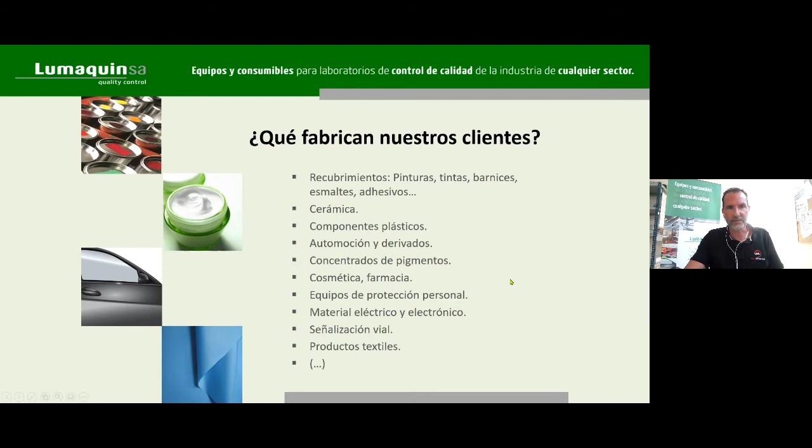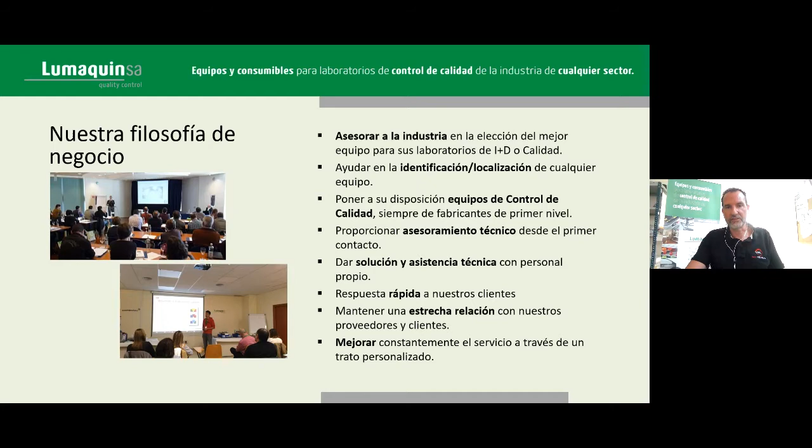Nuestra filosofía de negocio: somos técnicos especialistas en diferentes sectores y productos que fabrican nuestros clientes, y os podemos proporcionar cualquier tipo de equipo, accesorio o consumible de primerísima calidad para vuestro laboratorio. Por este motivo trabajamos con primeras marcas. Os podemos asesorar y ayudar con vuestras necesidades, os proporcionamos servicio de asistencia propio, damos una respuesta rápida a nuestros clientes y estamos siempre a vuestra entera disposición cuando se nos necesita. Es decir, ofrecemos una mejora continua del servicio.

¿Cómo podemos ayudaros a controlar la calidad del producto en vuestro proceso de producción de un recubrimiento? Ahora os explicaré un cuadro de procesos en la fabricación del recubrimiento. En este cuadro podemos ver en el plano horizontal el proceso de fabricación de recubrimientos, desde su inicio hasta su acabado, y en el vertical los ensayos y parámetros que influyen en cada paso del proceso.

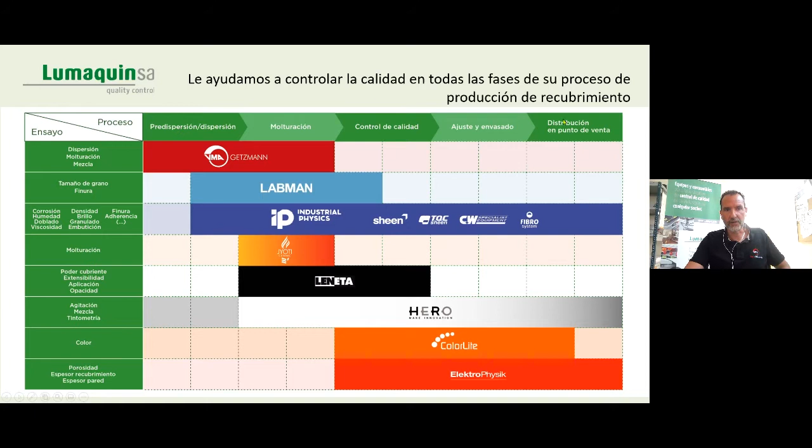Asimismo, podemos ver longitudinalmente todas las diferentes marcas o soluciones que tenemos y el nombre de la representada con la que trabajamos; son diferentes soluciones para cada ensayo. De esta manera podemos controlar todo el cuadro, desde el proceso inicial hasta el proceso final, que es ya la distribución o punto de venta.

En este caso, vamos a hablar del proceso de dispersión y molturación, con la colaboración de una de nuestras representadas, VMA Getzmann. Os voy a explicar una pincelada: VMA es una empresa dedicada a fabricar equipos de laboratorio, planta piloto y producción para recubrimientos, hasta 2.000 litros. Desde la fundación de la empresa, en el año 72, el nombre de VMA Getzmann ha sido sinónimo de producción de sistemas de dispersión y molturación innovadores y de alta calidad, equipados con dispositivos de seguridad integrados y de acuerdo con la directiva de la UE.

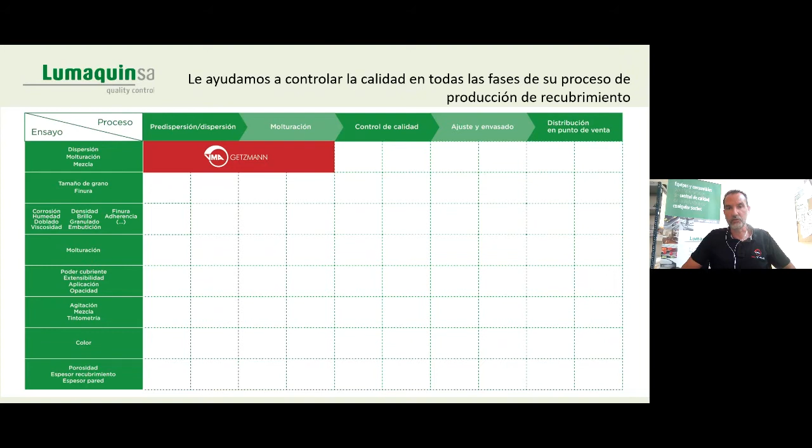De la que a continuación nos va a explicar el señor Christian Getzmann. Now I'm pleased to introduce you, Mr. Christian Getzmann, who will tell you more and better about the company VMA and the topic: safety systems and new control in compliance with the regulation for DISPERMAT and dispersing machine. Go ahead, Mr. Christian.

Okay, so let me start to introduce myself a little bit and our company. It's an older picture from our company from, I think, 2000. I want to talk today a little bit about new controls and compliance with the European safety regulations.

The safety is an aspect which is getting more and more strict, especially for dispersing machines, as you have turning dissolver discs, and they may hurt people. And of course, the controls we build, the machines we build, they have to be in compliance with the laws of Europe. And the second subject, if we have time, I want to go through quickly what explosion proof means for dissolvers, for laboratory, pilot plant, and also production machines, for our controls, and also with the new safety module we have released.

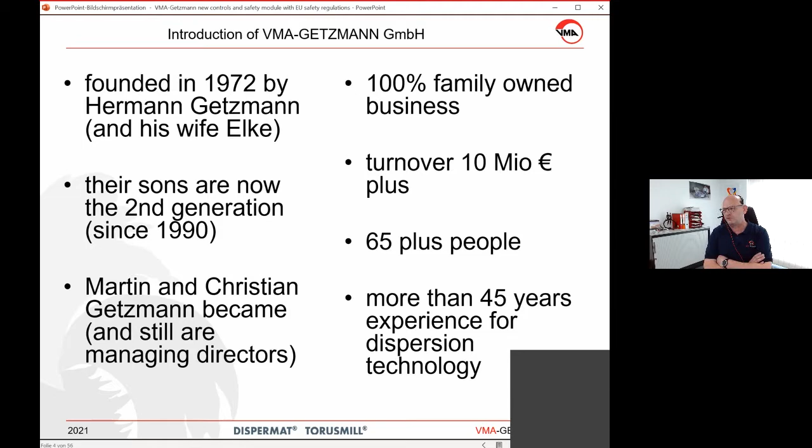We are located in the center west of Germany, so in the area of Cologne. Most people know Cologne, Bonn, the former capital of Germany. We have our own design department, so we tailor-make dissolvers due to the needs of the customers. We are supplying originally the paint and coatings industry, but meanwhile also inkjet, ceramic, pharmaceutical industries, adhesives. There are various industries. Wherever you do dispersion, particle reduction in a wet process, it will be a project for our company.

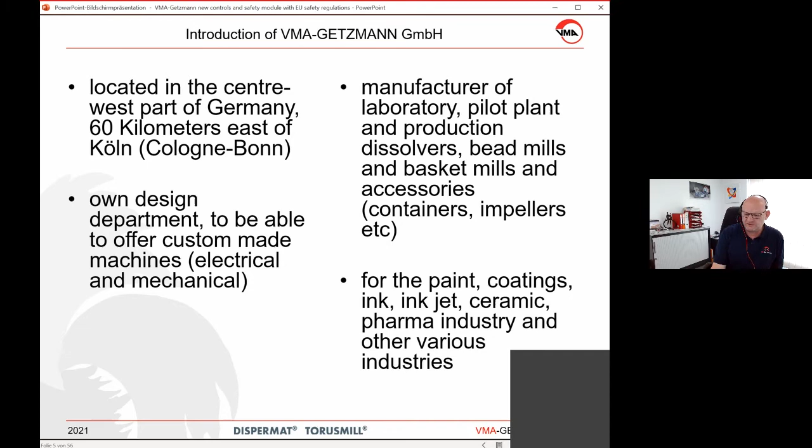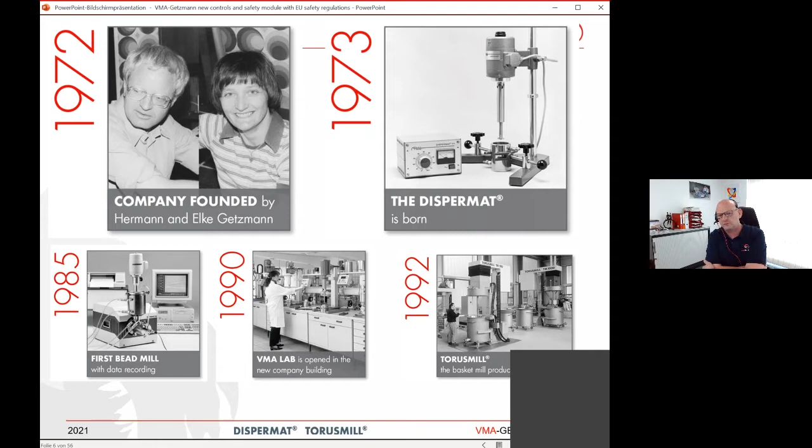So few pictures from my parents in 1972, and you can see the first DISPERMAT was born in 1973. You could see the very first DISPERMATs, they had already a shaft protection pipe. The container was held with a simple clamping, but there was no limit switch, nothing. In 1985, we built our first bead mill with our own built computer. In 1990, we opened our laboratory. In 92, we opened our pilot plant.

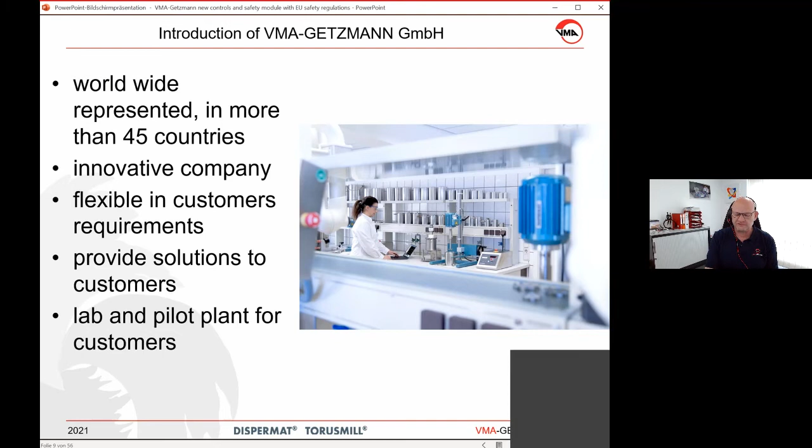Okay, that's me, my brother and myself, the company. We did an extension last year. It's now finished, we basically doubled the space. We are worldwide represented in more than 45 countries, like in Spain through Lumaquin. We keep several patents. We provide solutions to customers, and importantly, we have a lab and pilot plant for customers. So whenever you feel the need of a trial, we are more than happy to welcome you.

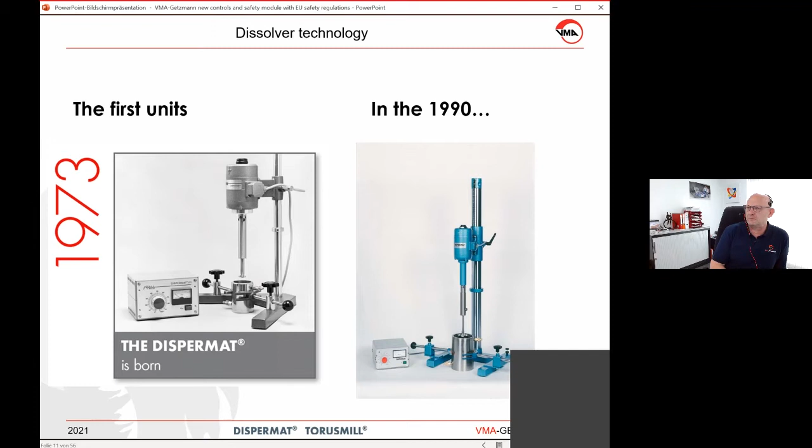Nobody thought about what happens if the chain breaks. Nobody thought, is there any security for the people working underneath with their hands? Nobody thought, do we need to have some kind of limit switches? So that was very much standard, and you can see abroad in many places it's still used like this.

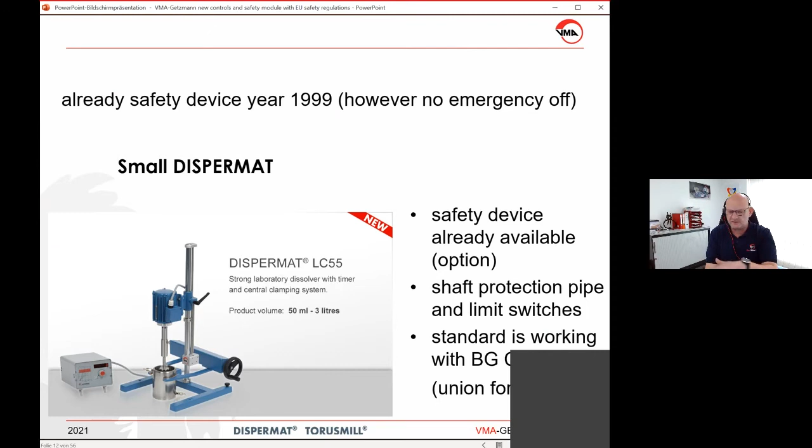In the end of the 1990s, 99, we started even for the smaller DISPERMATs to have safety devices. At that time it was an option. A safety device meant a firm clamping of the container was necessary. The dissolver disc is inside the container, and you are not able to swing the motor to the left or to the right. So that was conform with the standards of the BG, that is the Union for People Safety in Germany. So we kept that as our standard, but there was no law as such.

In the year 2000, for little larger dispermats with more than 2.2 kilowatt, there was a possibility to get covers as an option. There were limit switches, but you could see there were safety things here in the back where we tried to set the limits, the lowest point and the highest point, so nobody can get hurt. But there was no way of redundancy of limit switches. It's like braking with a car - you have different circuits. If one circuit breaks, the other circuit still brakes your car. So it was basically a one-channel technology.

The reason I mentioned the 2.2 kilowatt - in Europe, there's a gap for machines below 1.5 kilowatt and above 1.5 kilowatt. Just keep that in mind. There are different laws for really small instruments and a little larger instruments.

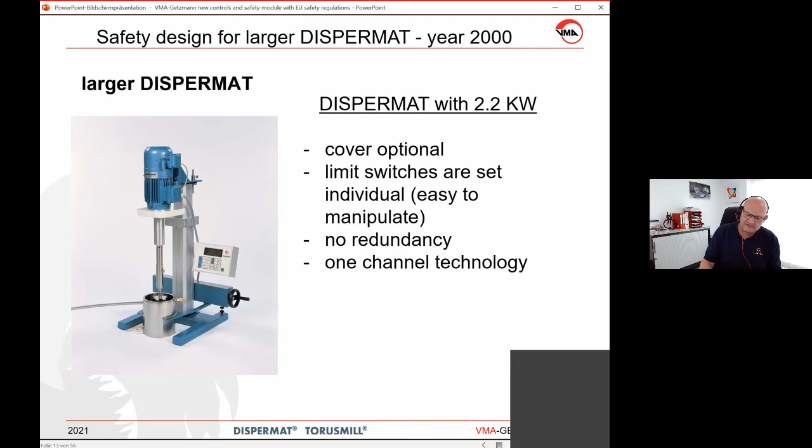So dispermats with current safety devices have an emergency off button. For the small dispermats, the cover is still an option. The limit switches should not be able to be manipulated. You have a safe clamping and adjustable limit switches. The question is always, you have different containers, and we have to make sure that with different containers, the customer can safely use the instrument.

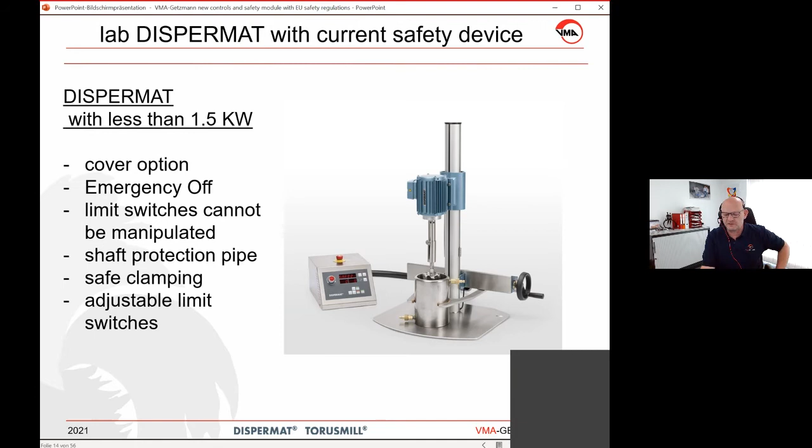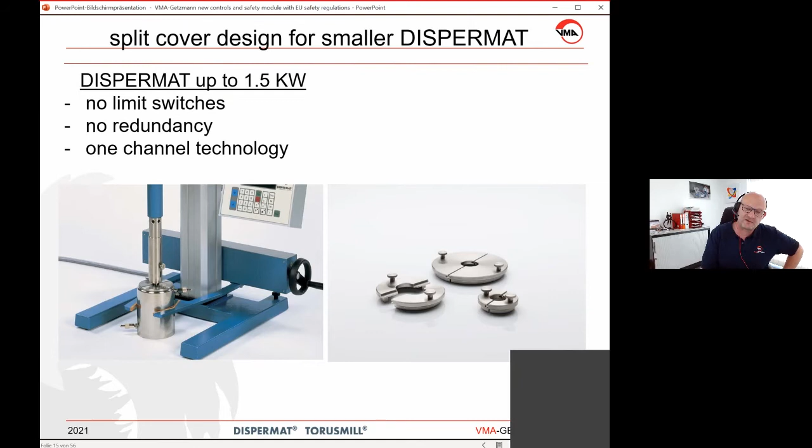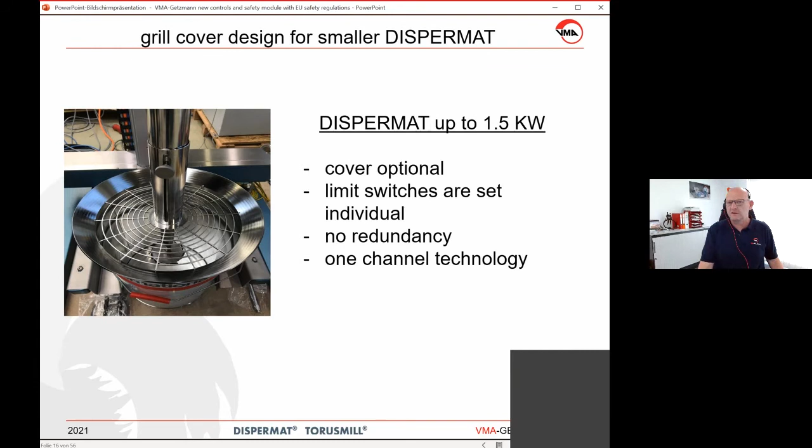Smaller machines, we could use split covers. Some people use carton, but split covers would be one way to avoid fumes coming out, and also to stop you putting your fingers inside. We developed that together with BASF. We call it a grill cover, so you can still see the flow of the product, but you are not able to put your hand inside, because that is always the issue. People are afraid that the user can put his hand into the system.

Very popular is also what we call a hanging flat cover. You have a cover, for instance, on the protection shaft pipe. You can move it up and down, and you can use it for different containers.

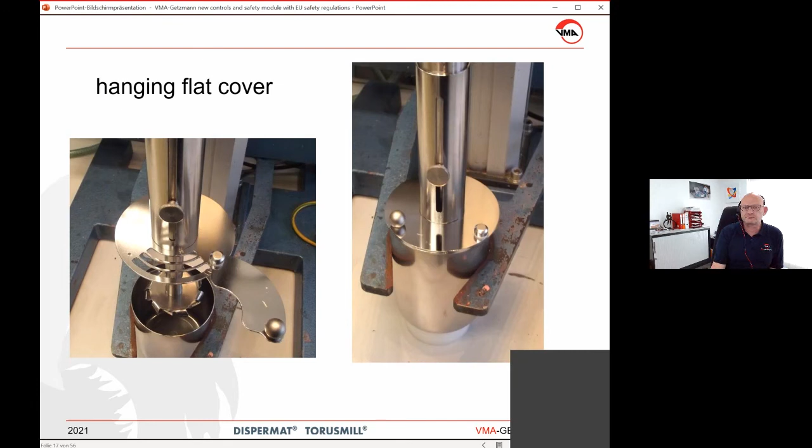There's also versions where the requirements are really strict, where we have split covers with sensors. This is just to let you know, this is not something invented by Getzmann. We call it safety distances for reaching through openings of regular shape. By law, there are openings with defined sizes. For example, if you have an opening of 20 by 30 millimeters, 2 by 3 centimeters, you need 850 millimeters, 85 centimeters, of safety distance for a proper opening. So all this is not invented by Getzmann, it's by the law. It's not something we want to do, but it's a must-have.

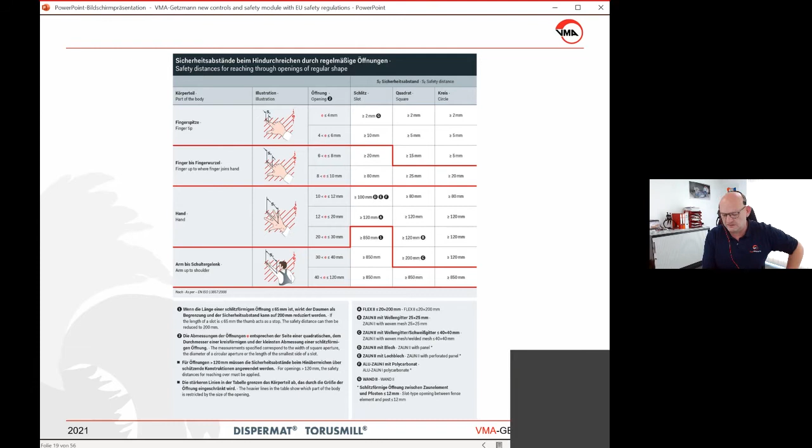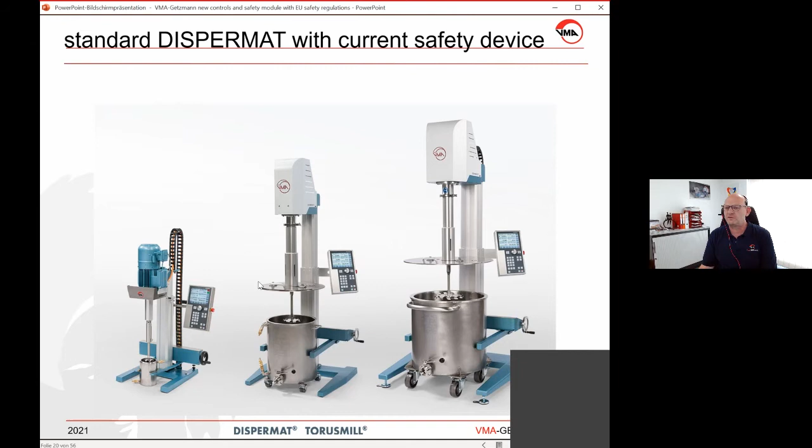You can see these are standard dispermats with current safety devices. The smaller machines without the cover, the larger ones with a hanging flat cover, and the other one also with a hanging flat cover.

So how we implemented this into our new controls: we have a control we call CN, that is pretty unique. We have an H1 and H2, two values we can select freely on the control panel. We set our lowest and our highest position of our dissolver disc, and we can also see the current height of the dissolver disc. So we want to reproduce our products, and for that it's quite important.

So with more than 1.1 kilowatt, these controls are redundant. With less, there's not a need for redundancy. We have a 2-channel technology for machines more than 1.1 kilowatt.

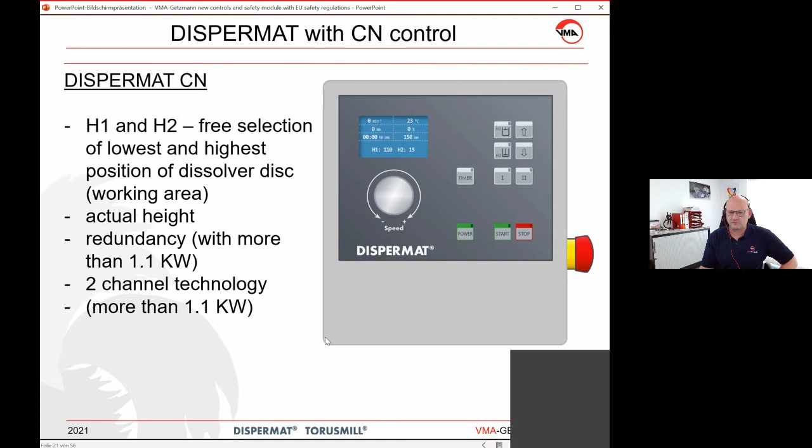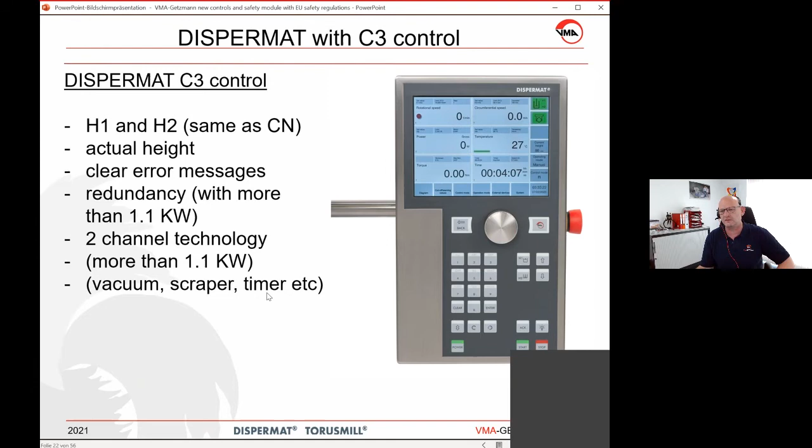We have another control, it's called C3, it's pretty new on the market. You also get the same H1, H2, actual height, but we have clear error messages, redundancy, and the possibility here for vacuum, scraper, and timer, elapsed time counting upward or downwards. You have a database, etc.

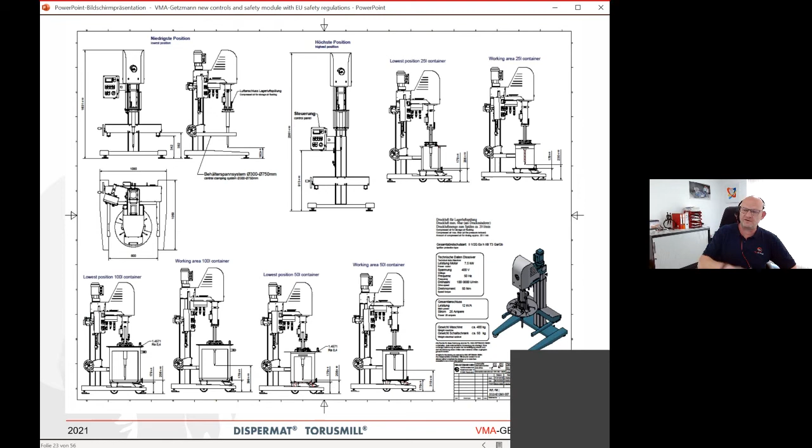That is very often what the customer comes to. The customer has not one container. In production it's different, you have one container dedicated for one dissolver. In laboratory, you have multiple containers, smaller and larger, but you only want to use one machine. We need to supply one safe machine for all of those different containers, including the covers. So the safety technology means for us that you can start the dissolver motor only if the container is safely clamped. We use the dissolver motor only if the disc is inside the container.

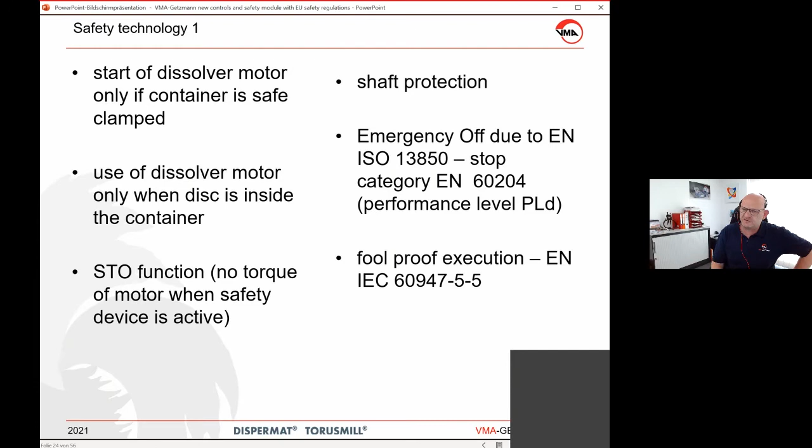We have an STO function, that is a function where no torque is built by the motor if the safety device is activated. It's important when there's an accident that the motor has no more torque to hurt any people. We need a shaft protection pipe, and usually this shaft protection pipe can be extended in length. We have an emergency off switch due to ISO certification category 60204, and it has to be a foolproof execution.

The motor is integrated with thermosensors, so it shuts down if it gets too hot. You also have a reduced noise level. The machines are delivered with CE certifications, and this is also quite important.

Whenever you have offers from any supplier around the world, you should be able to see at least the risk assessment. Risk assessment is something the manufacturer has to do to judge how risky his own machines are.

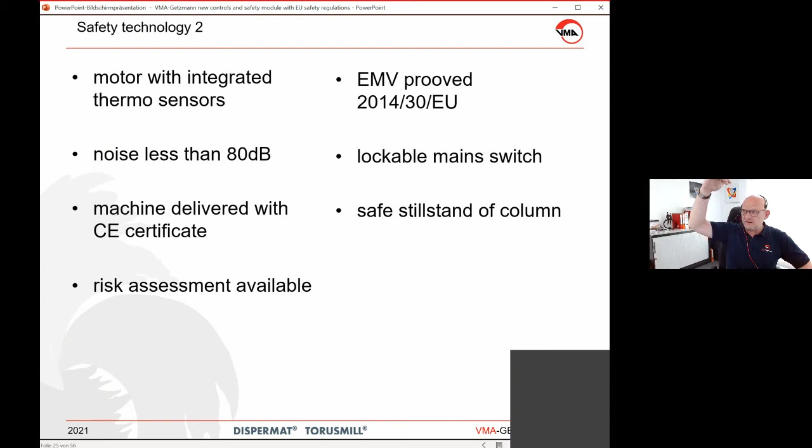We also have EMV approval to 2014/30/EU. We have a lockable main switch, and we have a safe still stand of the column, meaning the motor and the stand cannot go down immediately.

We have a 2-channel technology to Cat 3 EN ISO 13849 for machines more than 1.5 kilowatt, with cover, and what we call a self-teaching function. Important for you: there is no grandfathering for old equipment.

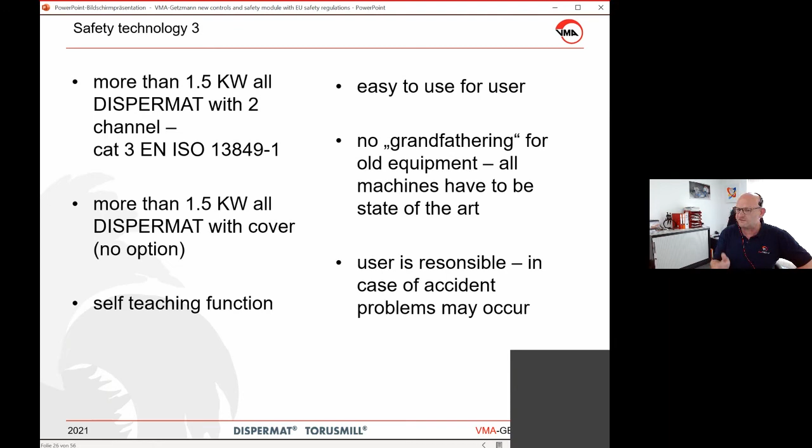People say, yes, we have old equipment that is 20 years old. That machine is not state of the art, and you're not supposed to use it anymore. People do use it anyway, and nothing happens unless you have an accident. If you have an accident, there will be investigations from unions, etc. So the user is responsible. You are responsible for the safety of your machines.

That is the summary. We are a little bit short on time.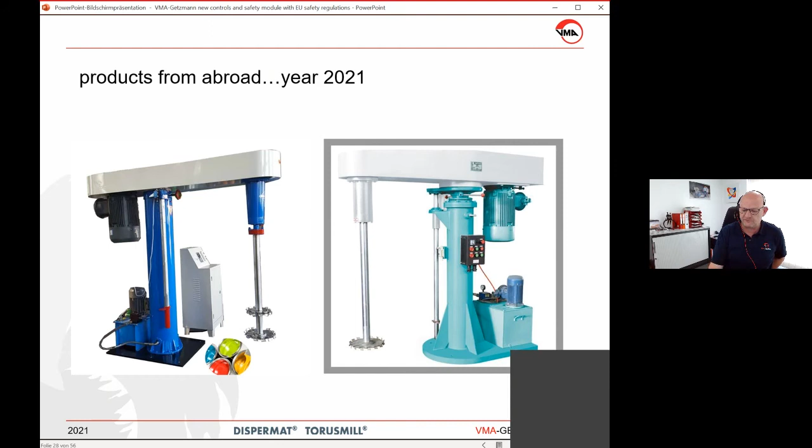Again, the lab has different containers from small to large. The handling should still be easy and comfortable. We have different positions of limits, and we have a TÜV-certificated safety module for that.

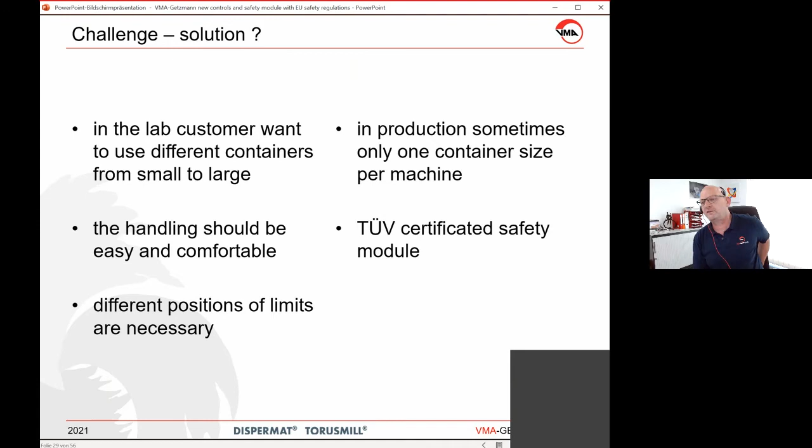So we realized the H1 and H2 not by something invented only by ourselves—it was invented by us, but it has been approved by the TÜV. To give you an idea, when you start to evaluate a machine, you ask how severe is the injury with a dissolver, and we say, okay, it's pretty severe—you get an irreversible injury.

Does it happen often or not so often? We say, okay, it's maybe seldom. Then we ask, how possible is it to have an accident? Is it less possible? Yes, it is less possible. So we come here to a D. Whenever you see this, it's called PLD, Performance Level D. Keep this performance level in mind.

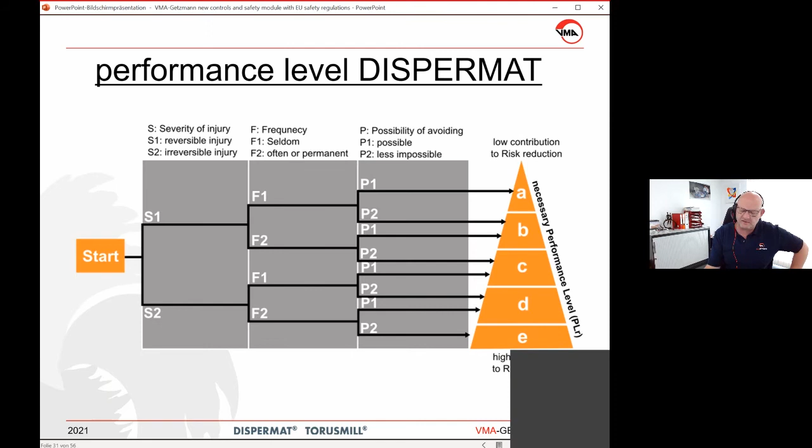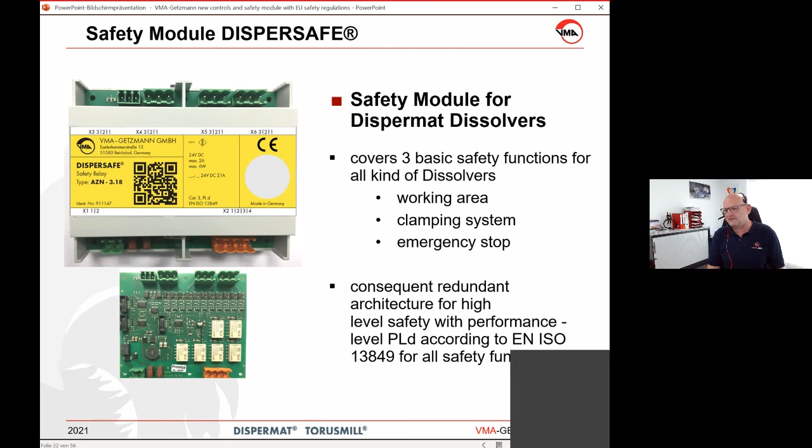If you Google it, you will find performance levels described in many different ways. This is the safety module we have designed. It covers the working area, H1, H2, the clamping system, and the emergency stop, all at the PLD level, with redundancy of course.

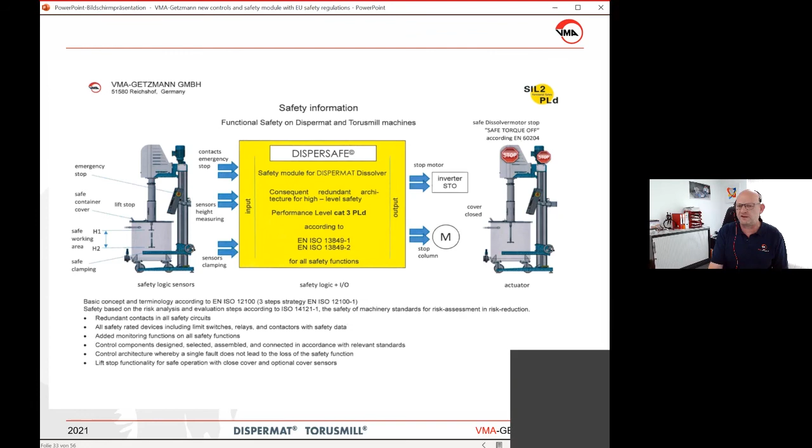So this is what we call DISPERSAFE, with the Cat3 PLD level—all the sensors, emergency switches, sensors, inverters, all made to that performance level. So we don't need external sensors.

We provide a comfortable teach function for H1 and H2, because in normal circumstances you have limit switches and you need to manually adjust them, which is okay for production machines, but not so much for laboratory and pilot plant machines.

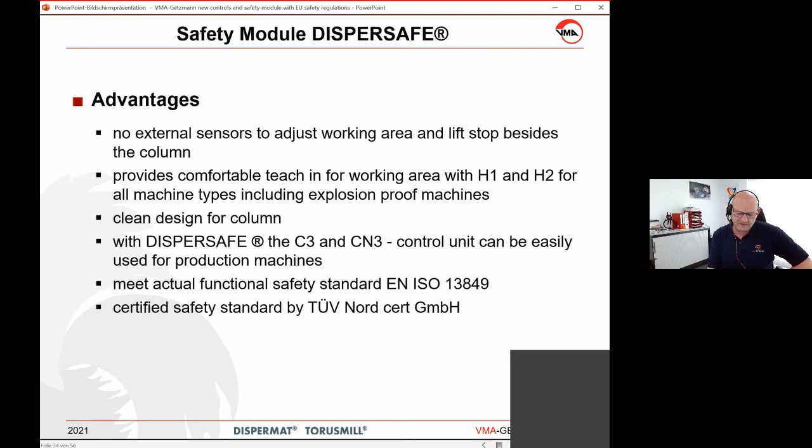However, we also provide the C3 and CN3 for production machines, meeting the actual functional safety standards from Europe, and it is TÜV Nord certificated.

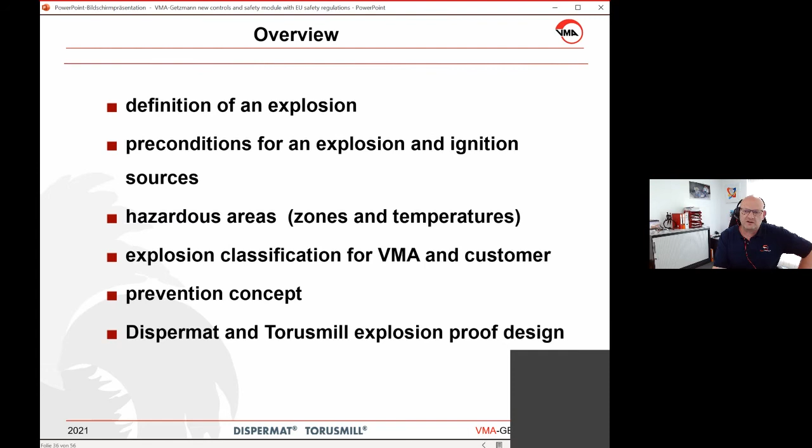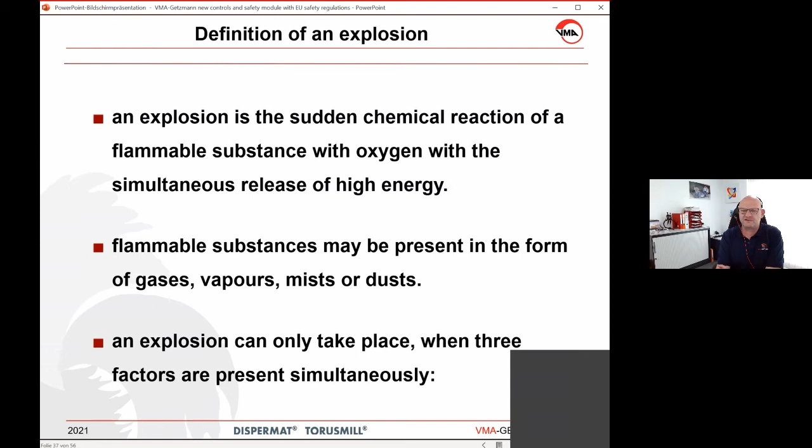Let me go through explosion proofing very quickly. What does it mean? What is an explosion, and what classification do we make? It's a sudden chemical reaction. Flammable substances may be present as gas, and an explosion can only take place when three factors are present: the dust, the oxygen, and the spark or heat that leads to the explosion.

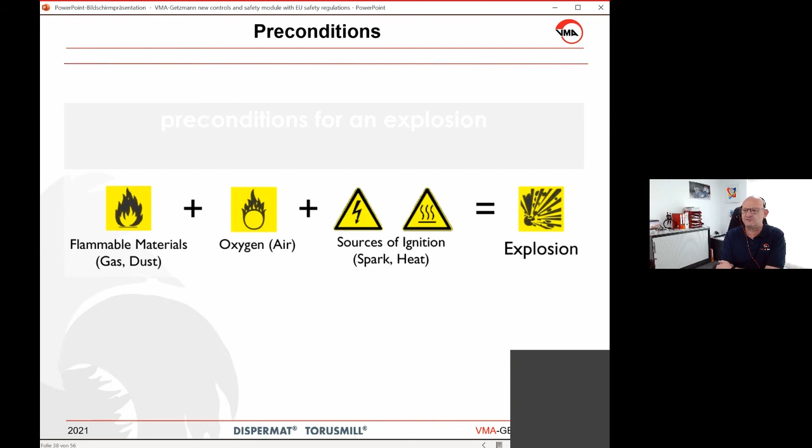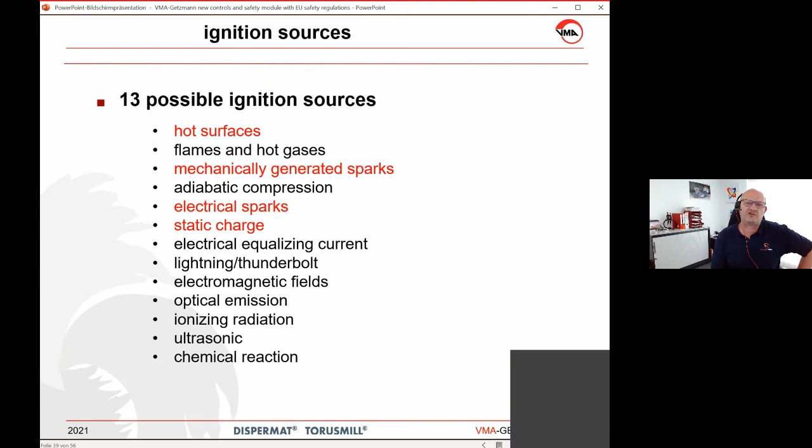There are 13 possible sources for this, and for us, hot surface, mechanically generated sparks, electrical sparks, and static charge are the most important. Actually, static charge is necessary for most explosions.

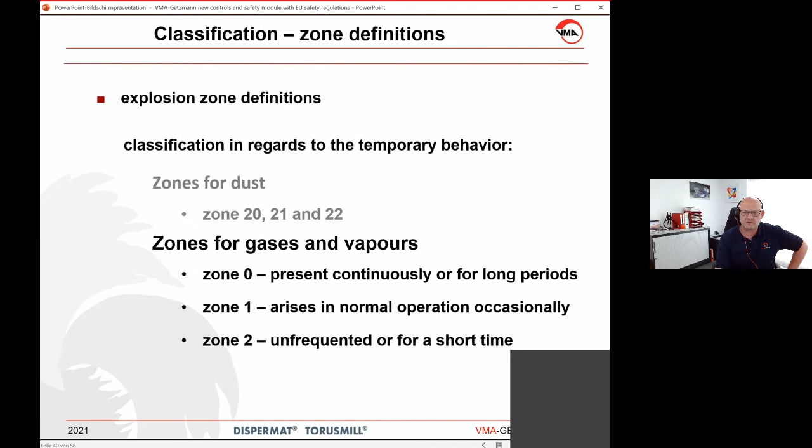We concentrate on zones usually for gases and vapors: zone 0, zone 1, and zone 2. Zone 0 is present or continuous areas, zone 1 is occasional, and zone 2 is infrequent.

And that is an example where we have the different zones. The zones are not defined by VMA Getzmann—they are defined by the customer himself.

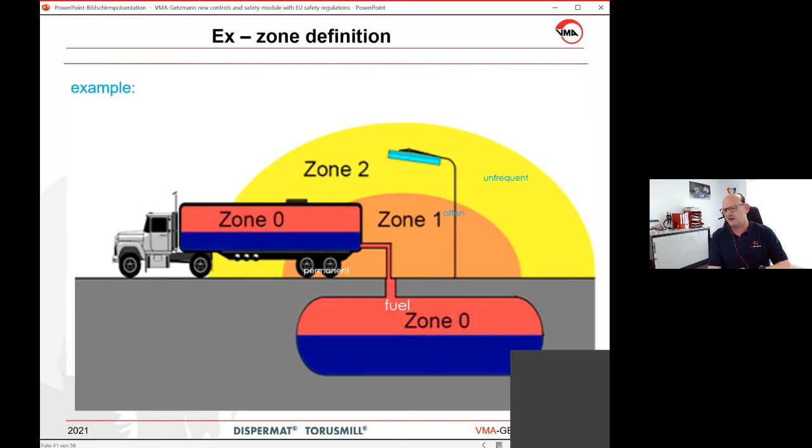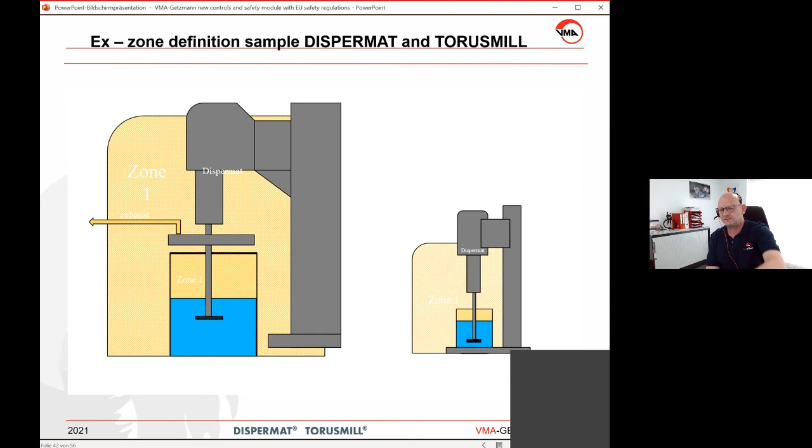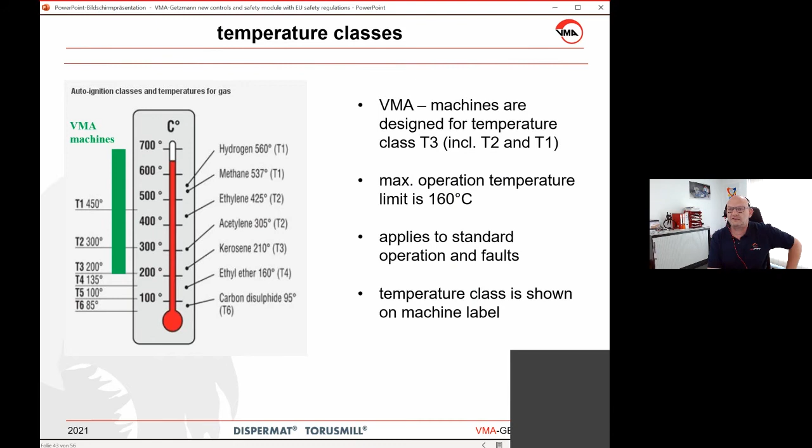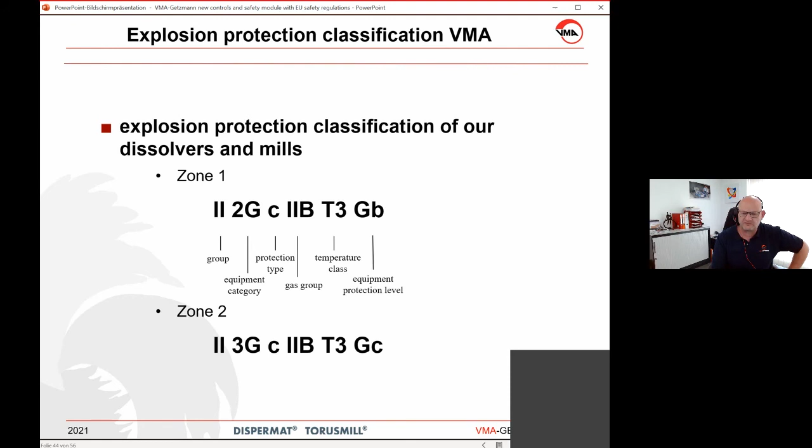You'd get different temperature classes. We operate usually with a T3 temperature class, temperature up to 160 degrees Celsius. At the end of the day, you have a labeling: a group, an equipment category, a type of protection, a gas group, temperature class, and a protection level. So we have zone 1 and 2. It's important for you what type of gas you have, and also what temperature class you have.

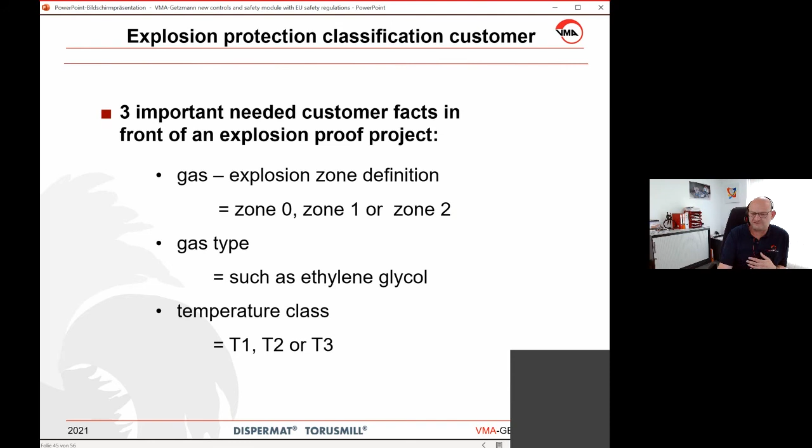We call this concept an integrated explosion protection. Getzmann needs to approach a safe design. We do this for mechanical ignition - that is the heat generated by friction, the sparks of grinding, sparks by hitting the dissolver disc on the side, or static load.

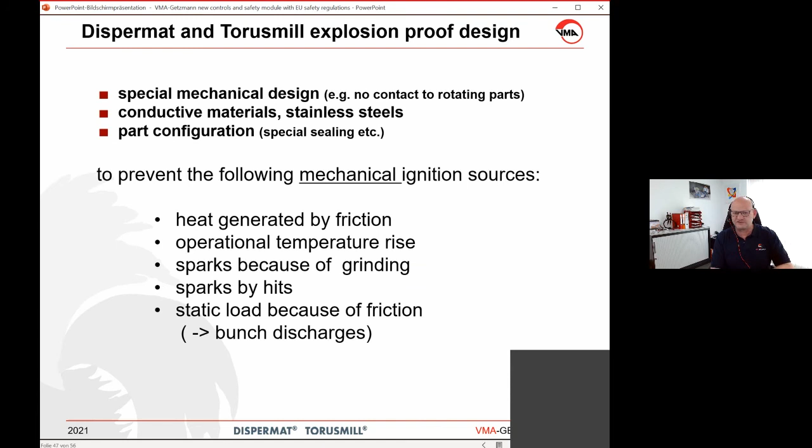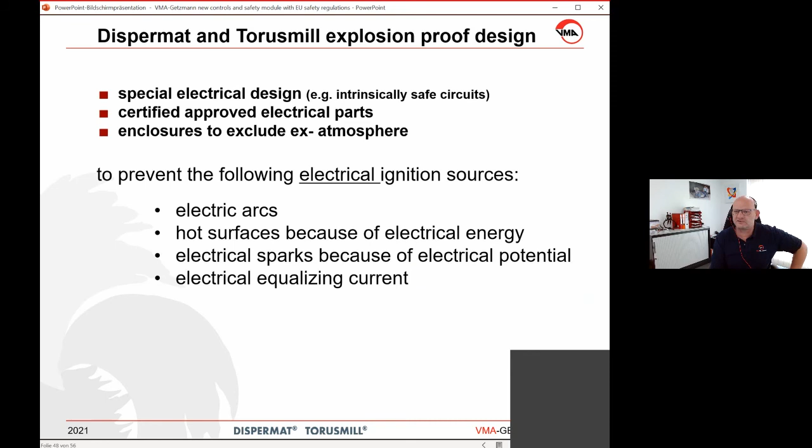And we do have also this for electric ignition. These are electric arcs, hot surfaces because of electrical energy, or electrical equalizing current. For Getzmann, we have...

All different zones - we offer machines for zone 0, zone 1, and zone 2. I have to say most common is zone 1. Those are machines, laboratory machines for example, built for zone 1. You can see the control box is in a housing.

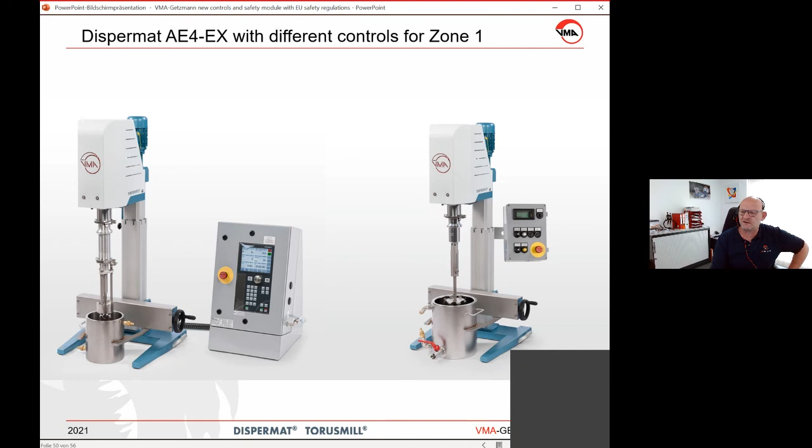That is a C control on the right side. It's a more simple control where you have only the speed indication. It's a larger instrument, also for zone 1. Small laboratory machines, which are less expensive, are built for zone 2.

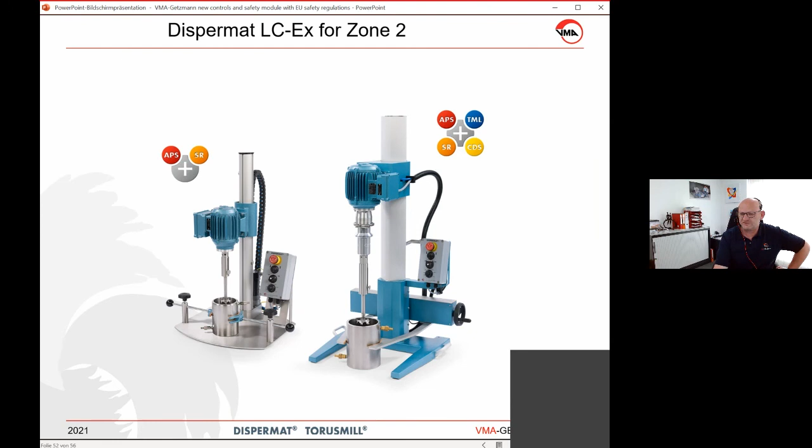There's all different accessory available for those machines. This is just to give you an idea of the family. So we do offer machines anywhere from 0.3 kilowatt up to 55 kilowatt.

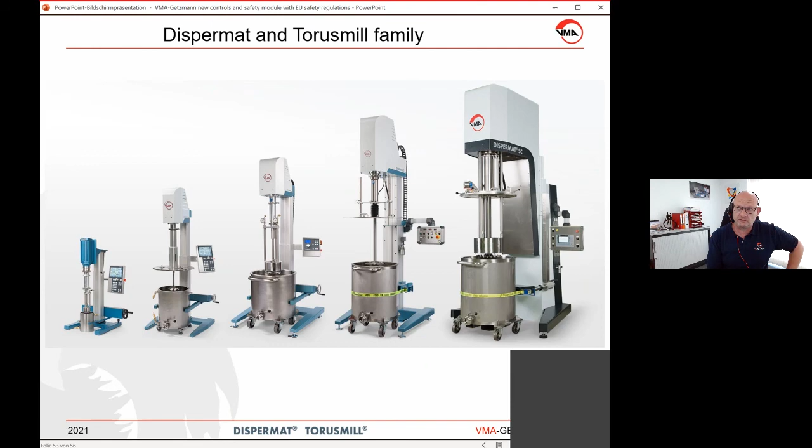This is below, of course, what a company like Netzsch is doing. We are in the smaller field of production equipment. Most important is to keep in mind the company is responsible for the safety and also for the explosion-proof areas. We can help you and offer you, due to the latest laws, the correct machine.

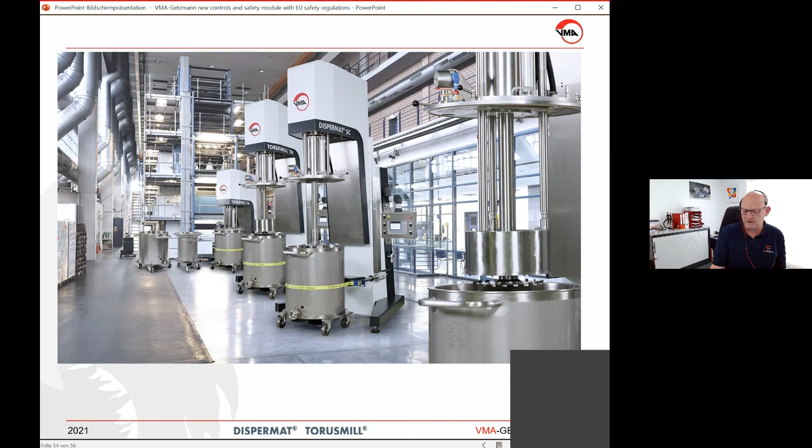Those are machines in a new production facility for a customer, just to give you an idea. And of course, the production machines are very often only used with one individual container. So then we use H1, H2, but it's not that important compared to pilot plant or laboratory machines.

Usually we go for exhibitions. There are no exhibitions, so we do it on Teams, which is a bit strange for me. The European Coatings Show, actually yesterday it was an announcement, is cancelled for this year, so it will only be back in 2023, unfortunately.

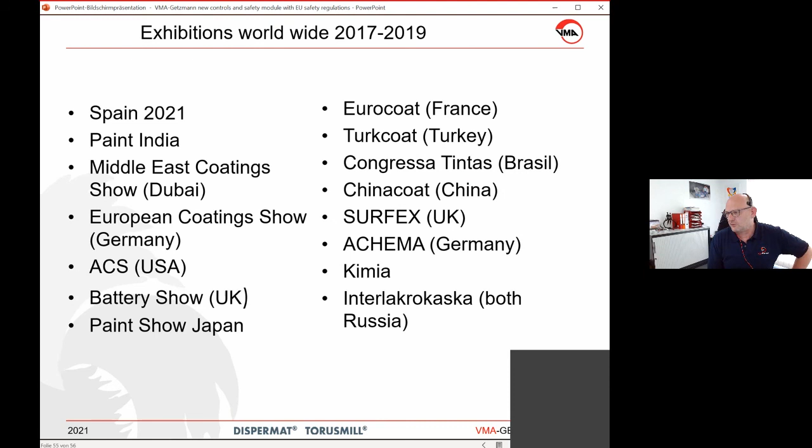I hope it was a little bit fast, but the time is pushing - I have only 25 minutes to talk. If you have any questions, you can ask now. You can also write an email to Lumaquin or to myself, and we would be happy to answer those. Thank you very much for your attention.